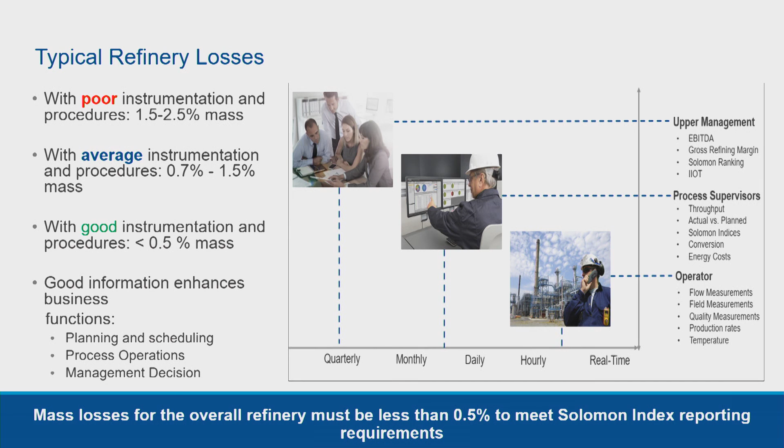You must be familiar, specifically refinery people, with the Solomon index reporting. If you would like to have a good Solomon's index reporting for mass balance, it's expected to be less than 0.5% for an overall refinery mass balance mass loss level.

So why does mass balance matter so much? Because we can identify three main things. The first is profitability - nobody would like to overpay for a product or be underpaid for a product they sell, right? The second thing is health, safety, and environmental - specifically within Europe this is much stronger than other world areas nowadays because of emissions. Nobody would like to pay a fine. That will also help you know your carbon dioxide level and other emissions levels.

And the third thing is process optimization. In addition to the refinery-wide mass balance, facility-wide mass balance, if you think about other units within your refinery, to optimize at all levels by learning what your inputs are and what the level of your outputs is, hopefully that will help you optimize your process.

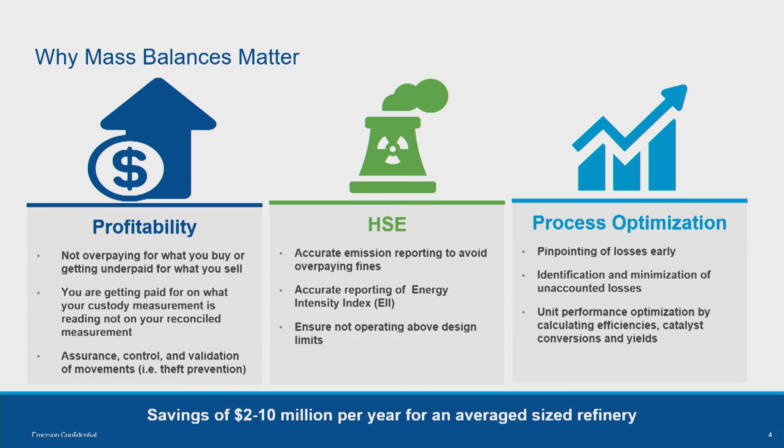When we look at the refinery loss control process, there are three main things we see so far. The first is measurement - as Bernard mentioned in the morning, the raw data is the first process. The second thing is business practices - how you operate your facility is one of the important processes. The other one, as we are all together for this, is using Sigmafine for data reconciliation software, which gives you the information of your mass balance level, the business practices, the operational practices. Data reconciliation software is what refineries and operators are looking for, and sometimes they underestimate the importance of the raw data, and that's where measurement is all about.

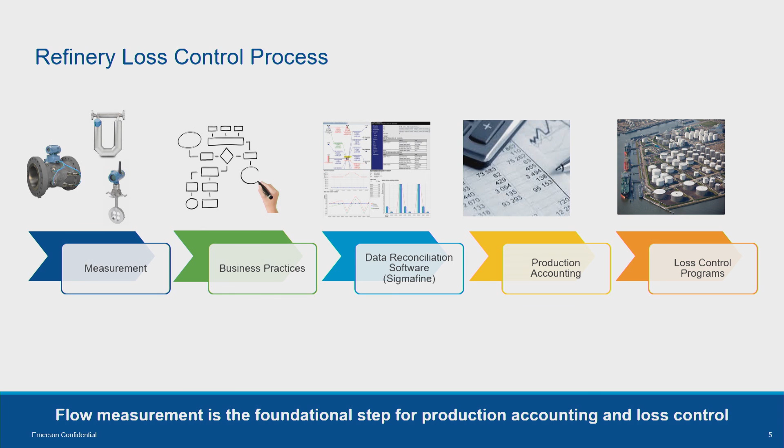I will give a little bit more detail. When we talk about mass balance, losses on the mass balance closure level could be unaccountable and accountable. This example you may have seen in the news.

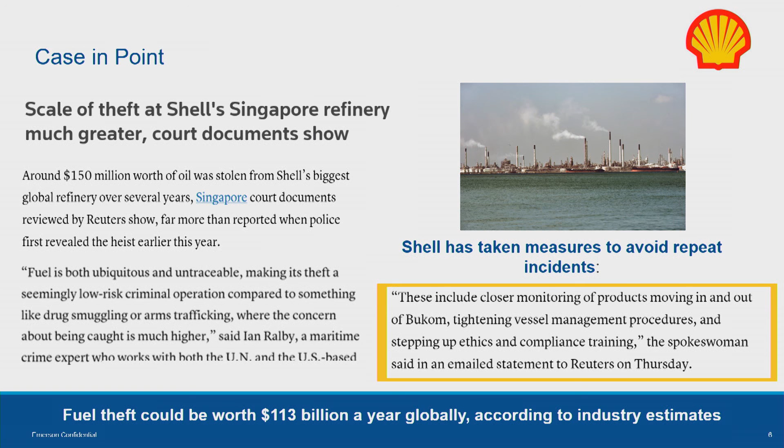At the Shell refinery in Singapore, over a long time period, small amounts of product unloaded or loaded from the jetty were stolen. There were some Shell employees and also ship personnel involved, and around $150 million worth of oil was stolen. This is one of the unaccountable losses - obviously theft. If you cannot measure accurately, you will not be able to understand what's going on. So Shell has already taken measures to avoid this type of incident by increasing their measurements for mass balance calculation.

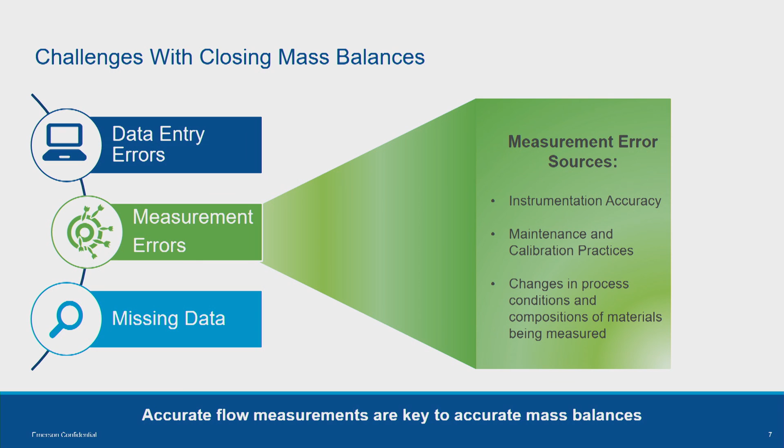The main challenges we have seen so far are data entry errors, which are mainly manual entries of data. The second thing is measurement errors - accuracy of instrumentation, maintenance and calibration procedures and practices being applied in refineries, and changes in process conditions. The other thing is missing data, meaning you may not be getting the right information or right amount of raw data from your facility.

When we look at process conditions differing from design conditions, we discussed measurement data issues. Most refineries, from a refinery perspective, are old facilities, and if you are using instrumentation based on its design conditions, obviously that has changed over time, and process conditions nowadays could be different from the original design conditions.

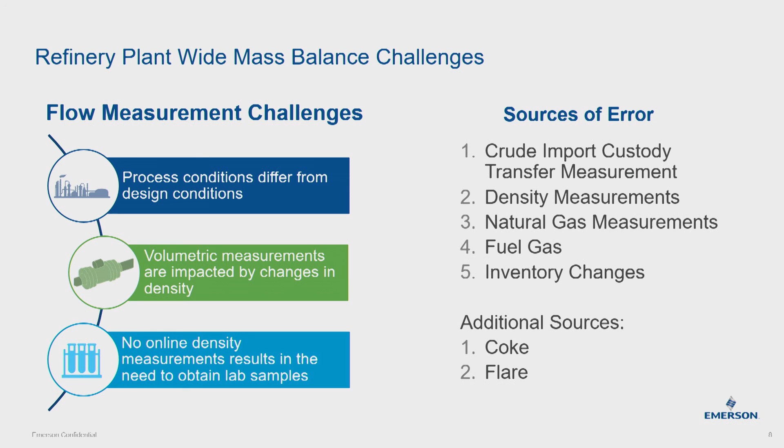Second thing is volumetric measurement. Volumetric meters depend on some changes, specifically density, and in facilities like refineries, density mainly changes during process changes. Third, as we do mass balance, online density is required specifically if you are using volumetric measurement. That's why you need a really accurate online density measurement - if you are using lab density, that may be changing over time when you apply the calculation.

This has also been shown during the day. You may be looking at Sigmafine and the software mass balance calculation perspective, but I would like to draw attention to the instrument - the meter itself - from the meter's perspective. By looking at statistical data or meter corrections, the Sigmafine software dashboards can help you understand the evolution of the meter during its life cycle, and whether the accuracy of the meter has changed or not.

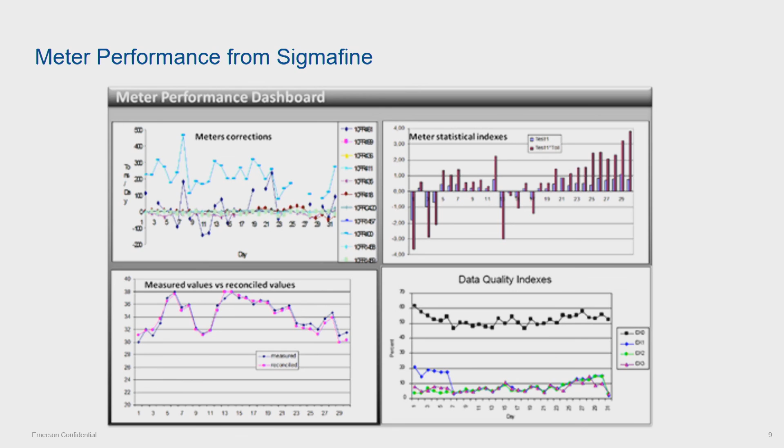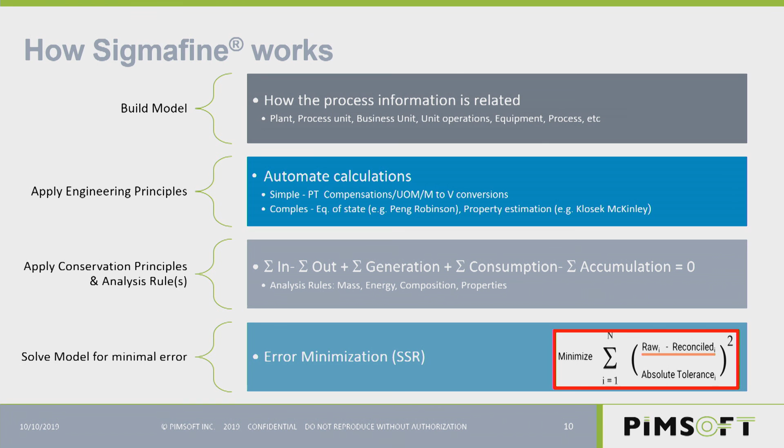So just by looking at it, you can understand through data evaluation whether the meter is in good condition or not. Another main point of using software like Sigmafine - if you look below - is error minimization. When you look at the calculation: raw data minus reconciled data, divided by absolute tolerance. So if you can increase the accuracy of your raw data, that will affect your error minimization via using your data reconciliation software, Sigmafine.

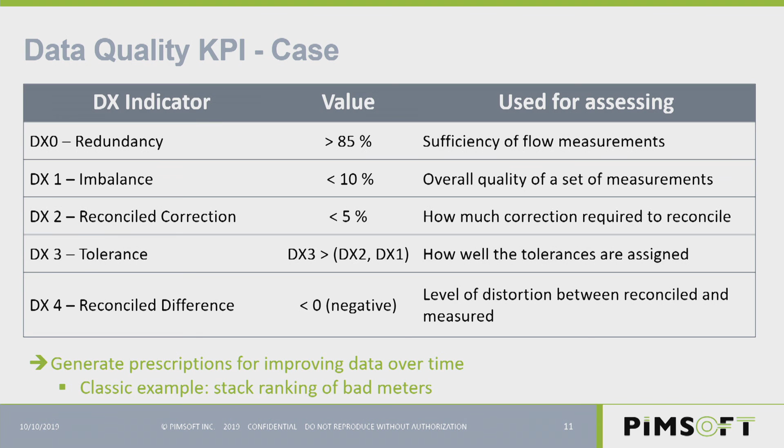Quickly, I'd like to mention - we'll get back to this at the end of the presentation - when you look at data quality KPIs via Sigmafine, you have some main ones: redundancy, imbalance, and tolerance. Redundancy is one of the most important data validation points within the mass balance closure calculations.

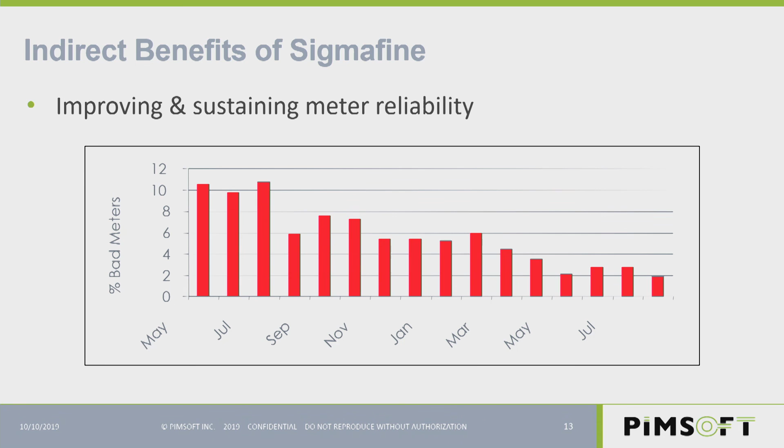When you look at the benefits of Sigmafine from this perspective, you may see it as an indirect benefit from a software standpoint, but from a metering and instrumentation perspective, you can easily see on the chart the evolution of the number of bad meters. This chart on the left shows the percentage of bad meters, and over a certain time period you can see how the number or percentage of bad meters decreases. So Sigmafine can still give you direct information about your mass balance closure in that regard.

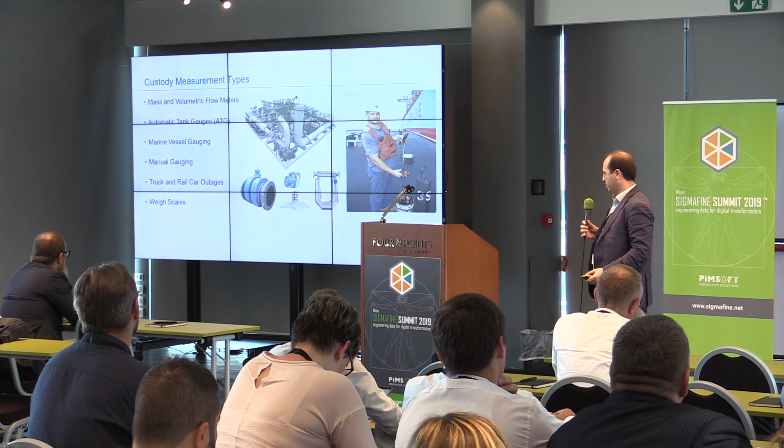So these are the main challenges, and I'd like to give some information about the solutions we can provide to measure and meter your products accurately. If you look at the custody transfer measurement types applied within facilities and refineries, obviously mass and volumetric flow meters, as we discussed. Automatic tank gauging systems are already used. Marine vessel gauging could be a little different from inside measurement and metering systems. Manual gauging is used, truck loading and rail car loading are also main metering points in the facility, and weight scales are also commonly used.

If you start with flow meter technology, refineries are around 150 years old, so flow metering is also a little bit old. Based on a survey, differential pressure products are one of the most commonly used in refineries, and have been used for almost 100 years.

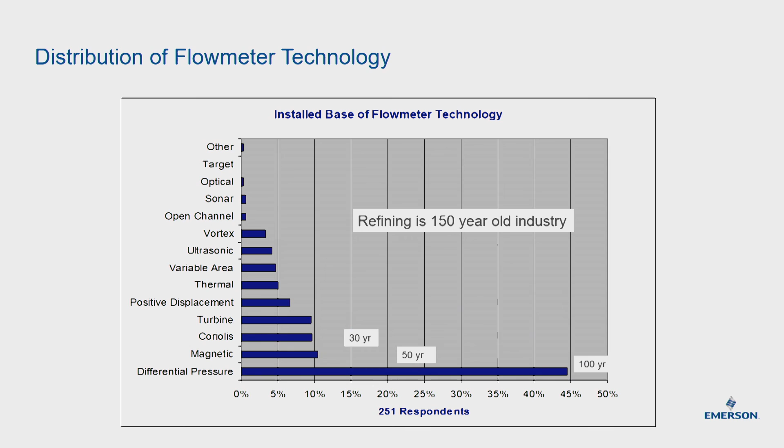If you look at the best existing situation in traditional metering, as mentioned, the design process specification was set when the facility was installed, and nowadays process conditions have changed. As shown in this graphic, differential pressure, turbine, and positive displacement are very well used. If you look at DP meters, orifice DP meters, it's a great application with great flexibility and a very good low purchase price.

But there are some limitations in the market for DP meters. It has poor accuracy if you do not compensate it, and to compensate it, you need to know the fluid density very well - that's one of the most important things, and it will give you moderate accuracy for your instrument. Also, you need to maintain it properly, otherwise accuracy degradation could really impact your accuracy level.

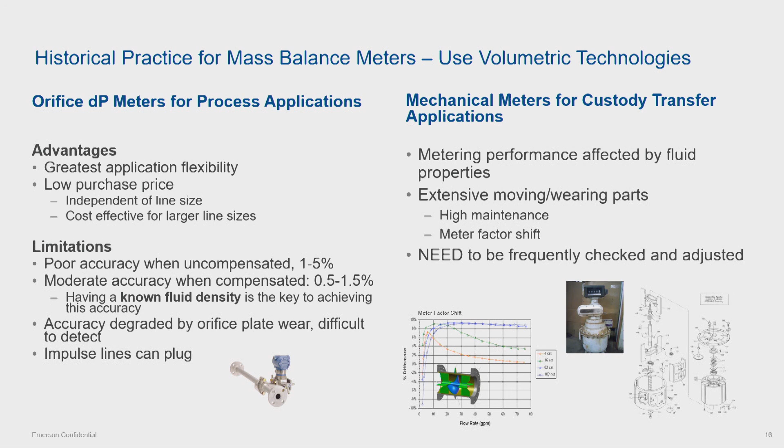When we look at mechanical meters, which are mainly volumetric meters, they require high maintenance, and there may be meter factor shift, so you need to frequently check and adjust mechanical meters. This is what we call traditional metering in the facilities.

But nowadays, for the last 30 years, Coriolis meters have become very well accepted in the market, as they provide direct mass measurement and also density measurement as an option. Coriolis meters have direct mass and density measurement, which is why they're not affected by changes in composition, like viscosity, temperature, pressure, and conductivity.

It has a great range for custody or non-custody measurement, and also very high accuracy - mass flow rate 0.1% accuracy, volume flow rate 0.1% accuracy as well. There is no flow conditioning required. Other volumetric meters require long upstream or downstream piping, while you can measure liquid, and we also suggest using it on fuel gas applications. It's a very broad range of possibilities to install in your facility.

It has natural bidirectional measurement, and very importantly, up to a certain level, which is 5%, you can measure two-phase flow - I mean some gases within the liquid. Specifically, Emerson Coriolis meters can identify these gases and correct itself.

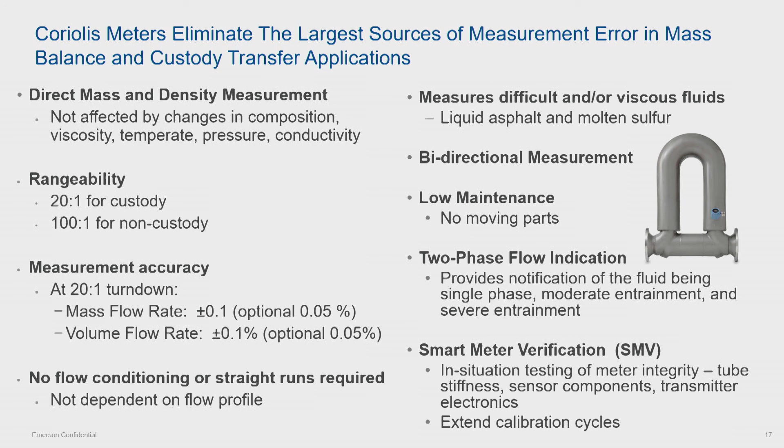And how do we do that? We call it smart meter verification. Smart meter verification is mainly a diagnostic tool approved by any third party that you may require - for Europe, it's approved by NMI.

You can use smart meter verification for any changes in your sensor calibration, like accuracy or flow calibration factor, any stiffness changes, any changes in electronic performance, any failure on the electronics, changes in configuration, and any effects due to process changes. It will give you an alarm and tell you if there's really a warning required within the Coriolis meter. That is one of the main differentiators for Coriolis meters for long-term stability.

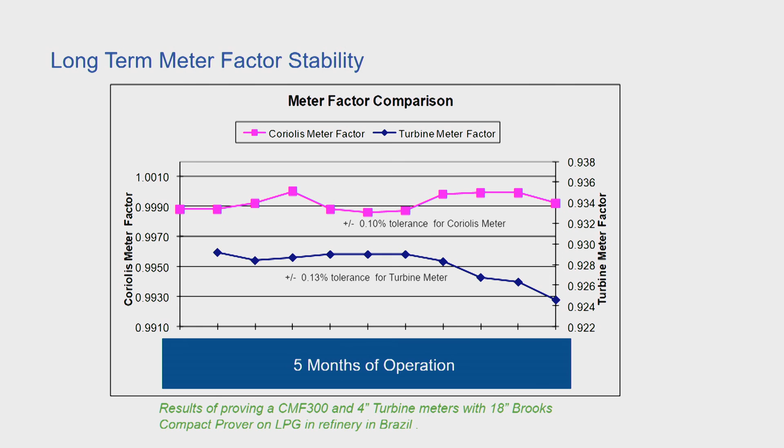As I mentioned, it has really long-term stability. You can see after 5 months of operation, there is a comparison between the Coriolis meter and the turbine meter, and you can see the change in meter accuracy after 5 months of operation, Coriolis versus turbine meter.

And as I said, it's very well accepted under any types of standards and regulations you may require. Emerson started around the early 80s to sell Coriolis meters, and by 2015, if I'm not wrong, we had sold 1 million Coriolis meters - so right now I'm expecting something around 1.5 million or so.

Just to give another example - even on ships, for tanker bunkering, Coriolis meters are used to measure the fuel oil specifically used for the ship itself.

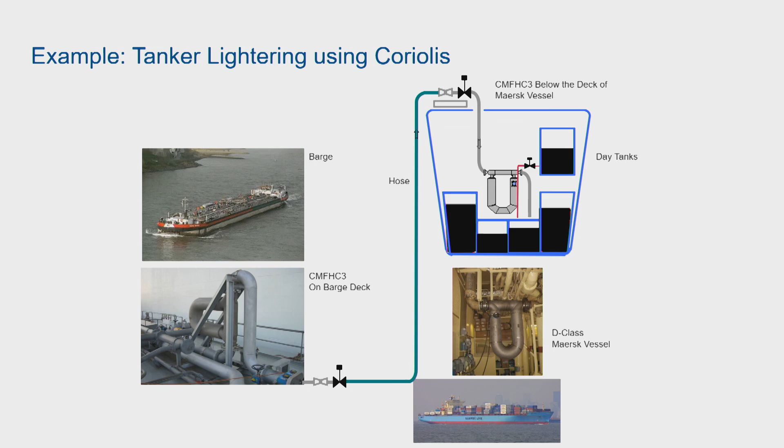So in addition to the, we started with the metering. In addition to the Coriolis meters, in some cases within the refineries, it's not easy to find out unaccounted losses, like, let's say, accountable loss, which is flare applications. It's not easy to measure, and specifically for high temperature, we are not able to use Coriolis meters, but we are working with another company together, and we are using ultrasonic meters because

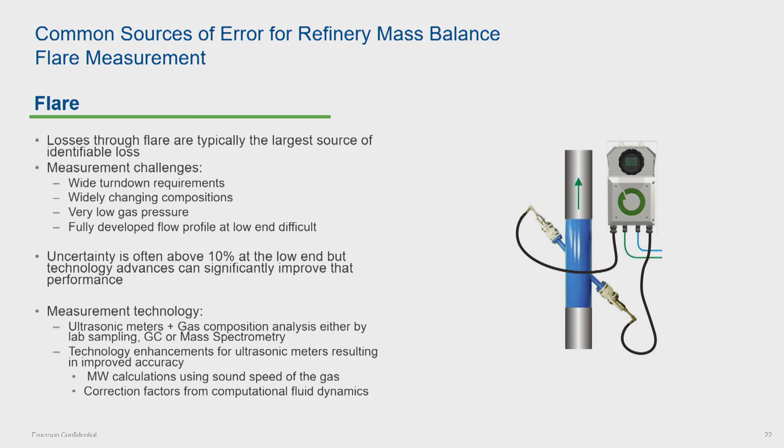Because of the different processes, obviously the gas within the flare may change. That's why there is too much uncertainty. So it is very difficult to accurately measure the amount of the gas within the flare. And as mentioned, instead of the Coriolis meters, ultrasonic meters are very well used for flare measurements.

And in addition to this, obviously for your product accounting, you need to check your inventory. And for inventory tracking, the most common application right now is automatic tank gauging systems. And when we look at an automatic tank gauging system, you require a level measurement, you require a product temperature measurement, you require density measurement, you require, if there is any sediment and water, you need to separate that, and one of the most important parameters is the tank strapping table.

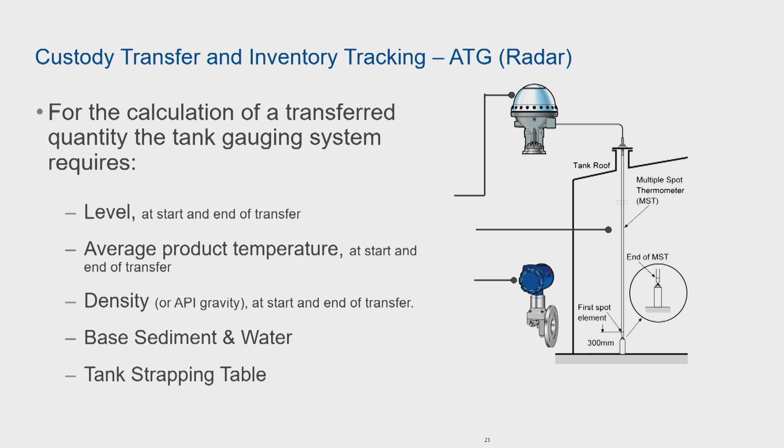And nowadays, Emerson as a group, Rosemount tank gauging system, if you look at the accuracy of automatic tank gauging, and if you look at the accuracy requirements within the market, like PTB in Germany, NMI or API, and it has been on the chart, the tank radar accuracy is way better than all these requirements, as you can see on the chart.

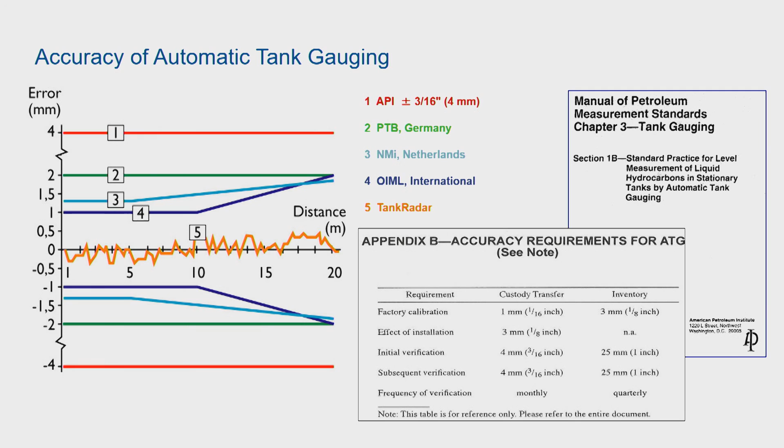So what makes automatic tank gauging system uncertainty important? It's not only the tank radar system that you use, it's not the instrument itself. You need to also think as a system. And as just mentioned in the previous slides, level measurement, temperature measurement, and other types of requirements. So the tank gauging system installation method is very important. So uncertainty in the tank capacity table, which means you need to maintain your strapping table properly.

So obviously Sigmafine is helping you on this to enter your data within the software and calculate the level of the strapping, calculate your temperature, tank gauging level. But in any case, the strapping table needs to be maintained properly. And the other thing is product temperature. You need to take your temperature on multiple spots on a big tank. It wouldn't be accurate if you take the temperature measurement on one point. You need to take multiple points to get the accurate measurement and decrease the uncertainty level.

And the other thing is, as just mentioned at the beginning of the presentation, density measurement. Because you are measuring a volume, you would like to convert it to mass because you are doing a mass balance calculation. So the density is also important here for your calculation.

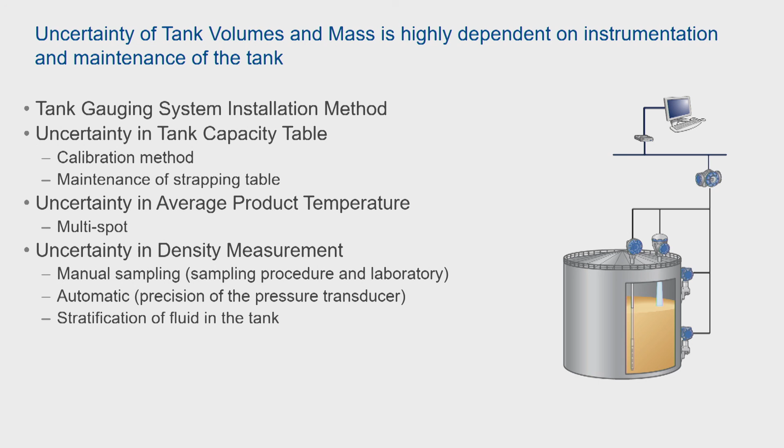So how to improve the mass balances? First of all, obviously, you need to evaluate your current closure of your mass balance. It could be your refinery-wide mass balance, facility-wide mass balance, or it could be a unit within your refinery or a chemical facility that you would like to do the mass balance, which will affect the overall mass balance, obviously. And Sigmafine, as just mentioned with the dashboards and the KPIs, will definitely help you to identify your measurement issues, specifically using the KPIs that we discussed.

And if you look very briefly at the critical balance points to prioritize for a refinery, the crude import point is the most important thing, crude charge to the crude unit, conversion unit feed rates, primary products for accurate yield data, and unconverted bottoms on the process units. And how we can help? We can start to perform an audit within your facility, specifically on the measurement points, and we can help you to identify or make a plan for your mass balance improvement level.

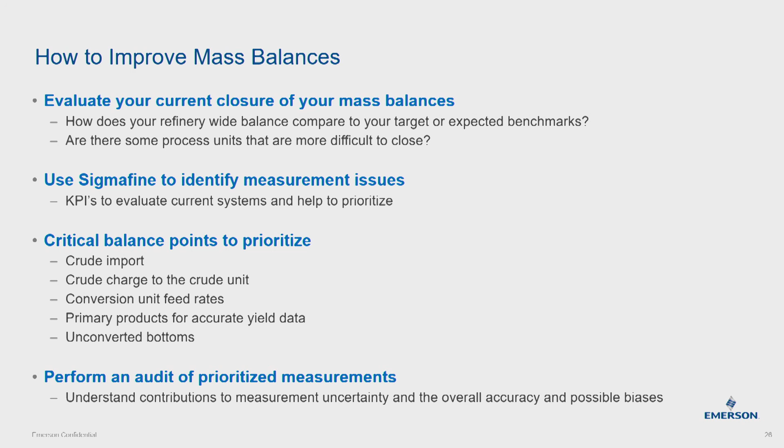So, key takeaways for me today. Thank you again to Sigmafine for giving us this opportunity. For a mass balance calculation or mass balance study, you need to understand where the missing and inaccurate measurement points are. And as said, Sigmafine can definitely help with this.

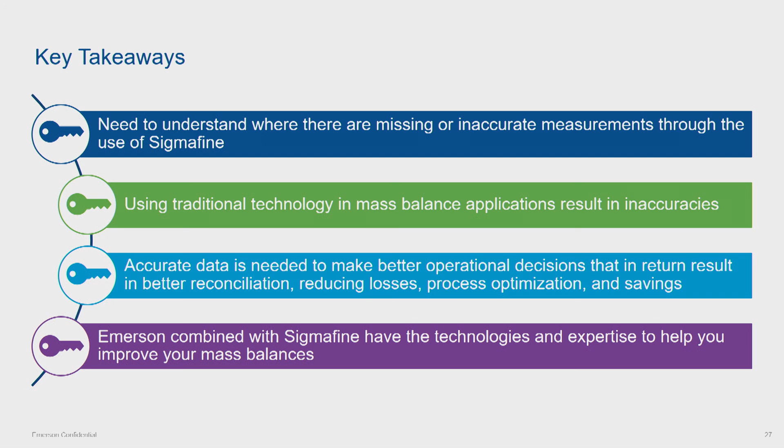The traditional technology in mass balance applications can cause inaccuracies that you underestimated. You may underestimate it, let's say. And accurate data is very important for data reconciliation, reducing losses, and optimization of your process. And Emerson, together with Sigmafine, is ready to help you with your mass balance improvement anytime.